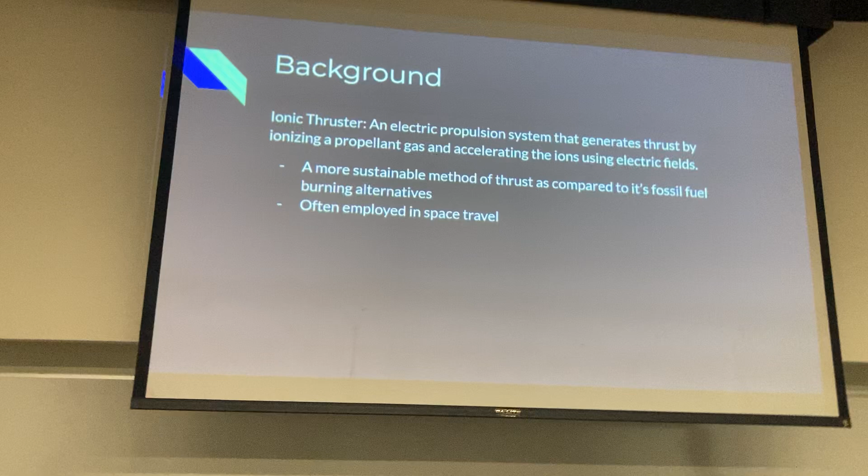Okay, so a little bit of background. First, what an ionic thruster is. I'm going to rely a little bit on the slide because there's a lot of words here. An electric propulsion system that generates thrust by ionizing a propellant gas and accelerating the ions using an electric field. So it's a more sustainable method of thrust compared to its fossil fuel using counterparts, and it is often employed in space travel. In fact, that seems to be the prevailing employment of the technology.

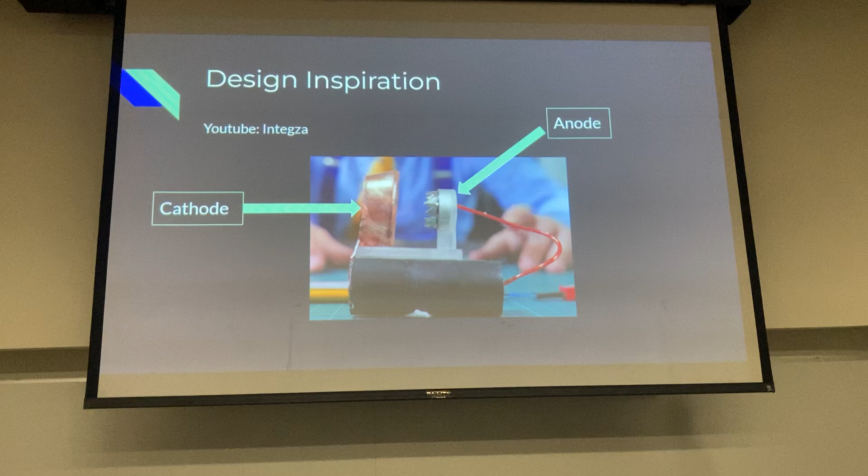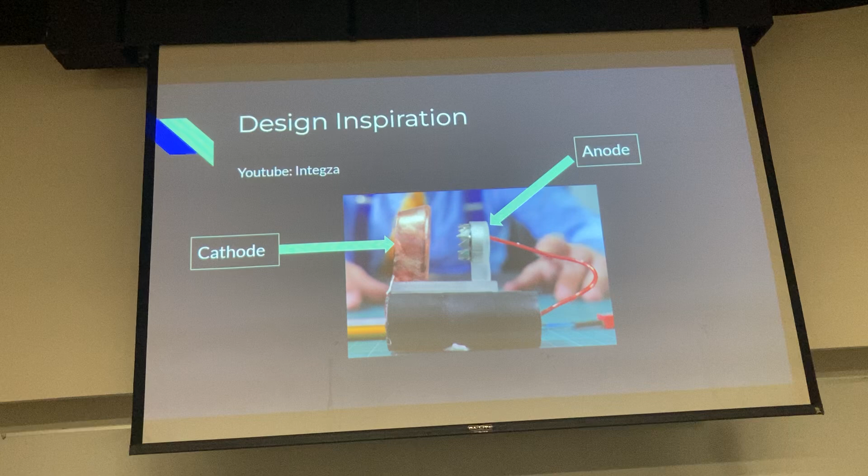So this was our design inspiration. When we decided to do the project, we figured we'd have to have at least a starting blueprint to model our design after. We looked through a few different YouTubers' designs, and we found Integza. He does all sorts of scientific videos building many different machines. He has a couple that went into the ionic thruster realm, and this was one of them. So we tried to emulate this design.

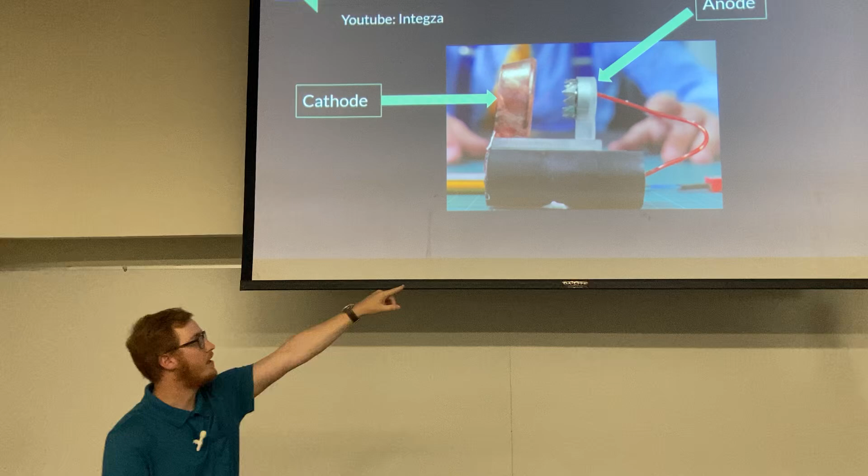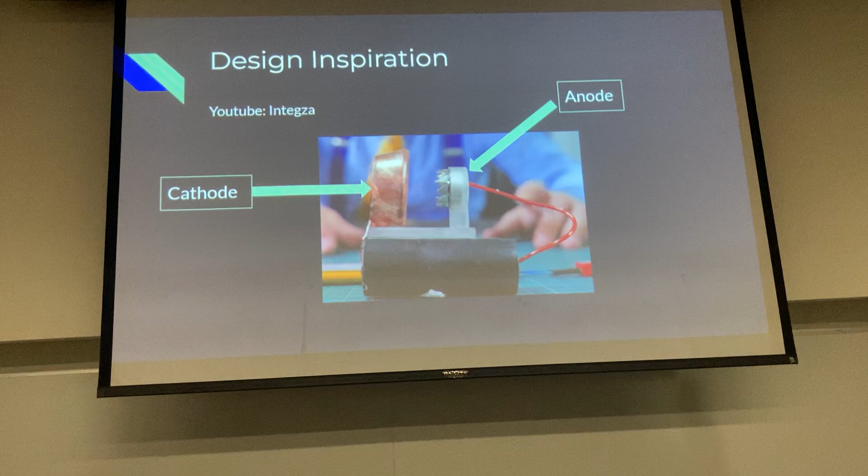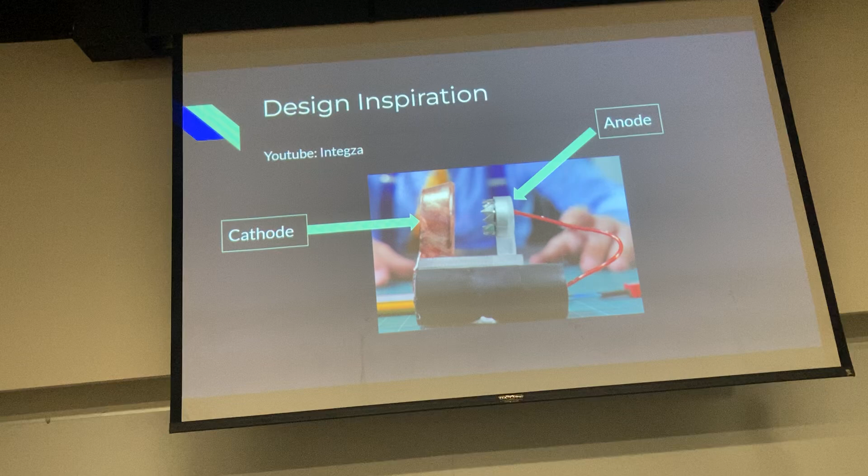At the bottom is that black portion, that's the transformer, which is getting some voltage from a DC power supply. You can see that red wire running up to the anode. That is a nickel piece that has been cut into a crown shape. It will get the charge from the transformer, and then it'll send that charge over to the cathode. That's a 3D printed piece that was then painted with conductive graphite spray and then electroplated with copper. So the anode takes that charge and it ionizes the air molecules, and then it forces or accelerates those air molecules through the cathode, creating some air velocity coming out the back of it, producing that thrust.

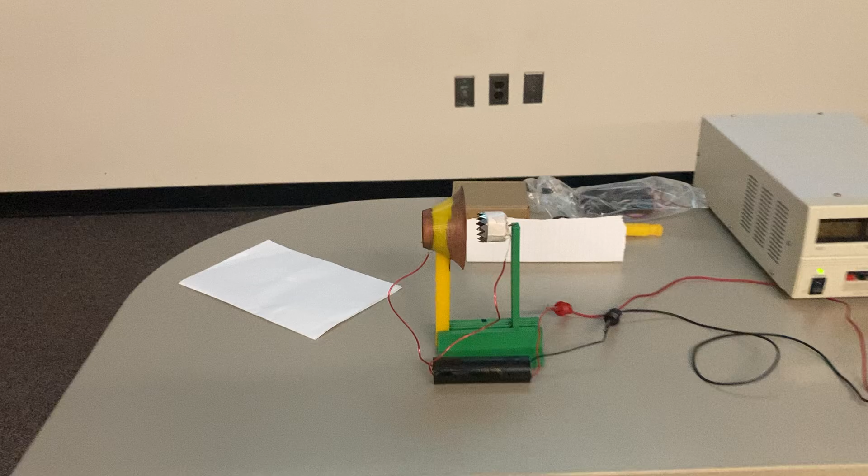Okay, so the initial plan was to test a few different variables. The original ones we wanted to test were diameters. We ended up kind of moving away from that as we went on. We might get into that a little later. But we also wanted to touch on what the voltage input does. How does the air velocity change depending on how much voltage is being put in? What kind of relationship is it? Is it linear? Is it exponential? What we were going to measure, like I said, was air velocity. That was going to be our metric going forward to determine what relationships there were, what was taking place inside the thruster.

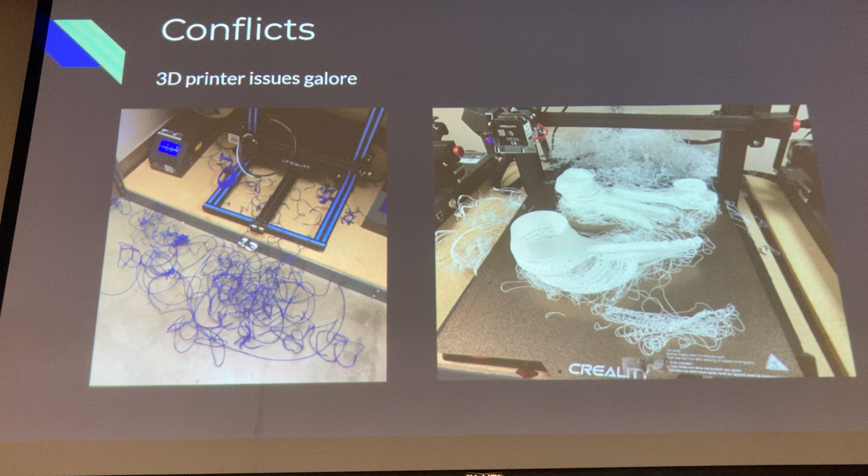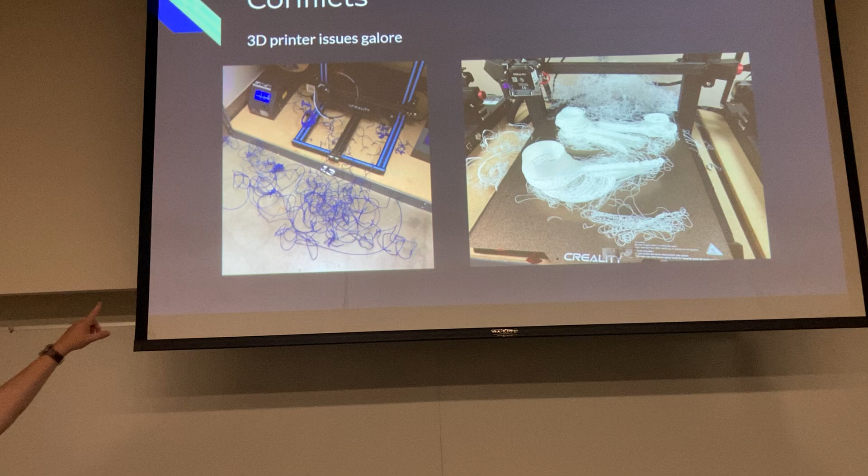But we had conflicts. I think it took about 15 prints to finally get what we needed. Here's just a couple examples of failures that I have no idea what the issue was. I never changed my file once. I just plugged it back in and eventually it worked. So like I said, those are just a couple of the issues we ran into. On the left, that actually messed up the printer quite a bit. A few of the components fell off of the printer and those needed to be fixed afterwards.

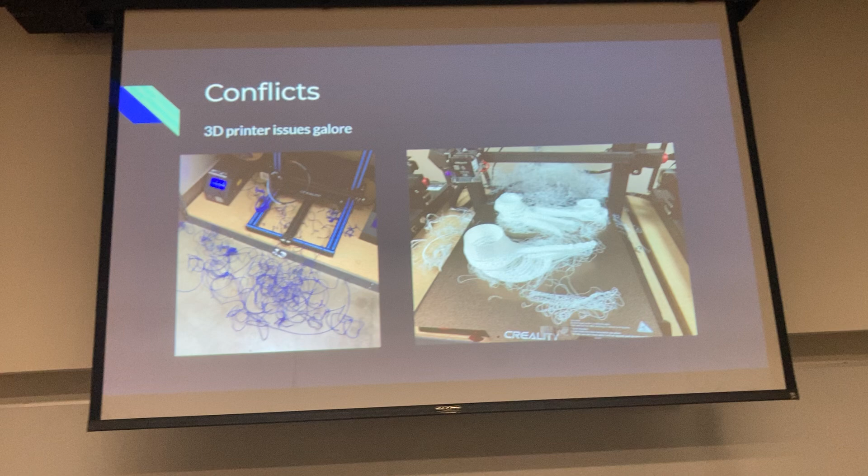Yeah, and just a quick add, I did meet with my father. He's a designer, and he sometimes 3D prints stuff. So I changed the design, and I tried to print it out, and then the exact same issues were happening. So it made us question what in the world was going on. We kind of nailed it down to it was probably the filament in the printers, because the printers got used a lot in the Learning Commons. So we were able to use the printers over here in the IME 100. And we ended up getting a lot better results.

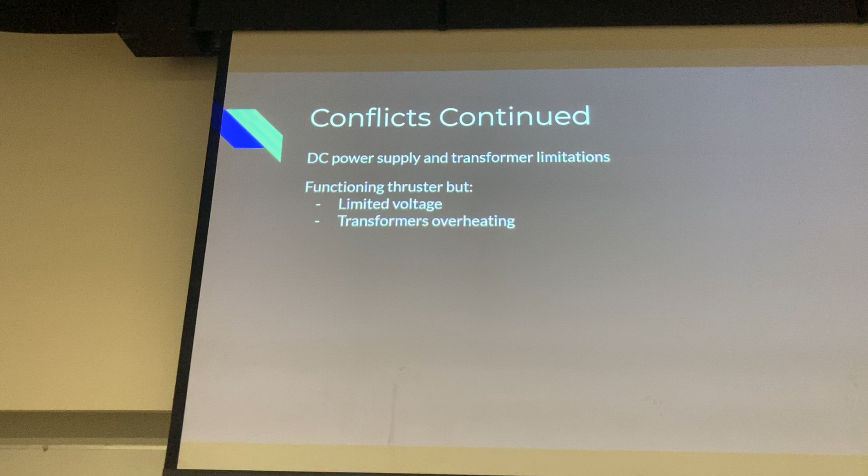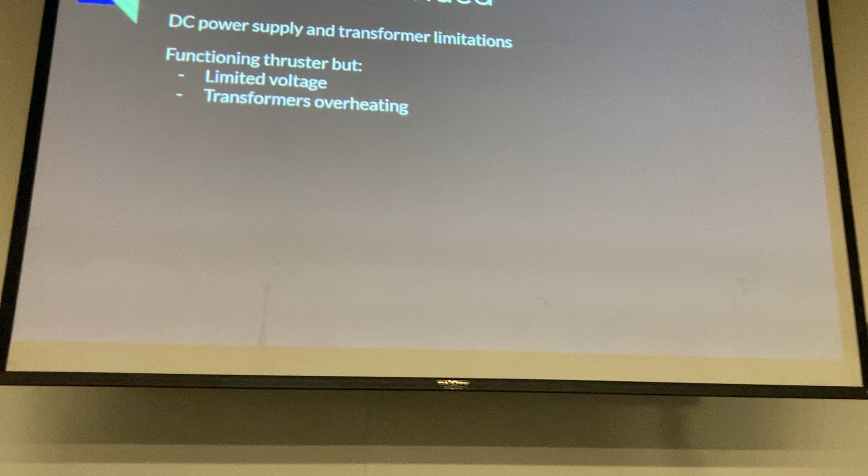Okay, so we also ran into some other conflicts. You can probably talk about those, you're more familiar with these. Yeah, so with the transformers, we were able to buy the 3 to 6 volts transformers, and they boosted up to 400,000 volts, or 400 kilovolts.

One of the main issues with them is they don't run for a very long time, so if you're trying to test multiple tests at one time, more than likely the transformer will blow up on you. Another issue was limitations in the voltage. We ended up buying 6 to 12 volt transformers to see more results, but past 12 volts we still couldn't get any results. So that was some limitations on the input.

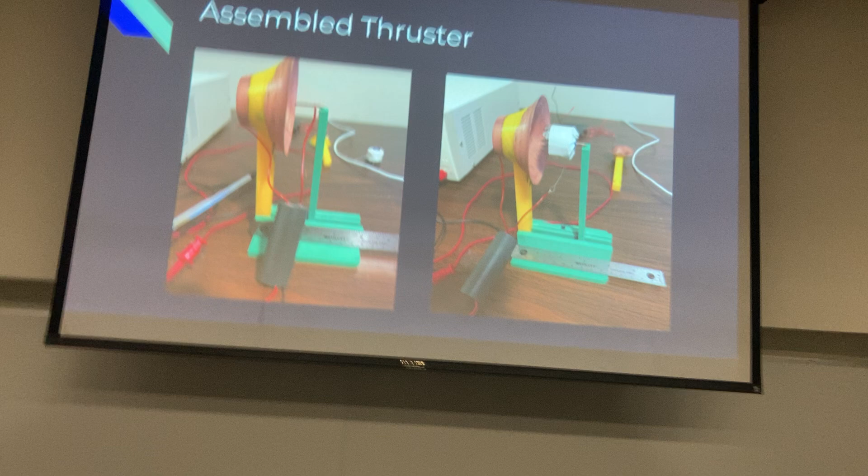This is a couple of pictures of the assembled thruster. At the bottom you might notice the ruler. I was doing some optimization with our design to see what distance worked best with our inputs.

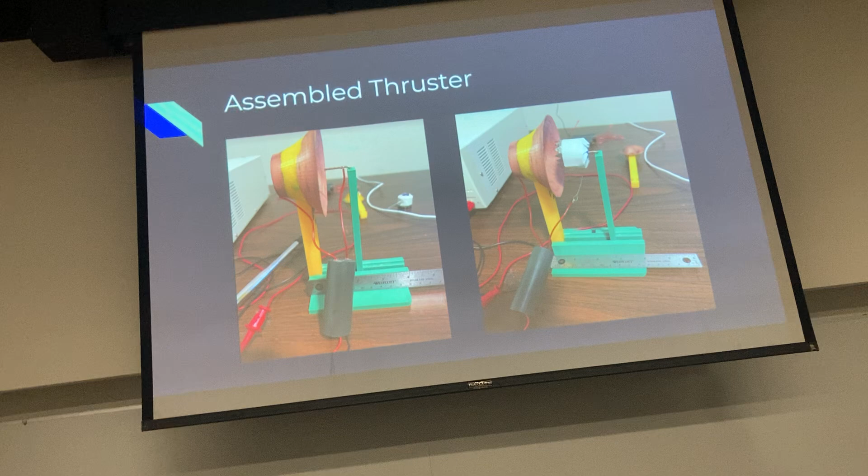You can also see there's a copper wire on the left-hand side, and then there's a crown on the right-hand side. The copper wire was just to see how the thruster would react with having one point instead of multiple points. Unfortunately, it didn't respond as well, so we went with the crown.

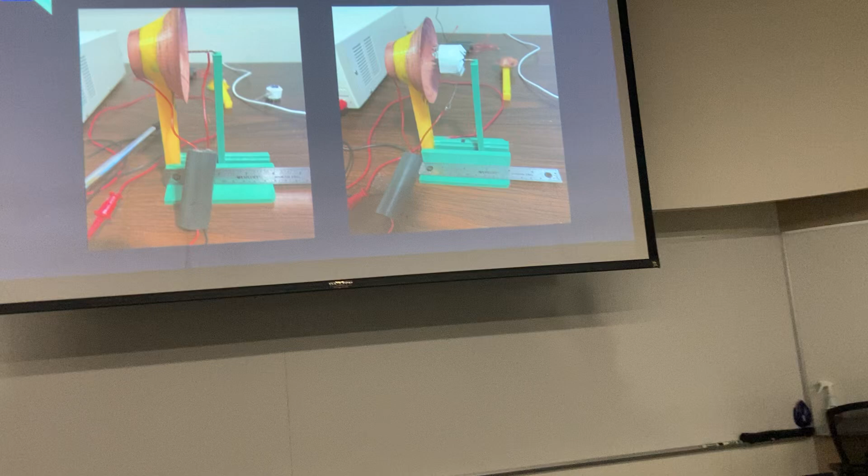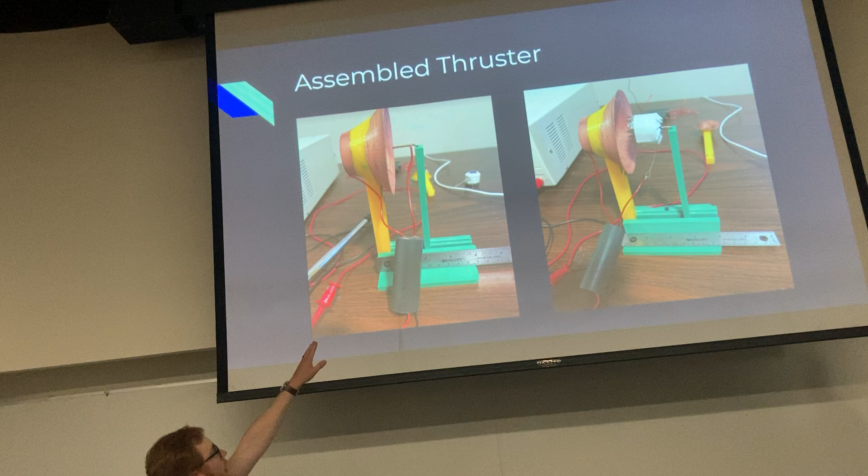So this was the... you can see it obviously looks a lot different, but it's got all the same components as in Texas, that inspiration we drew from. We have the transformer running up to our anode, and again we used the crown design. Like you said, we stuck with what we originally were going to use from that example.

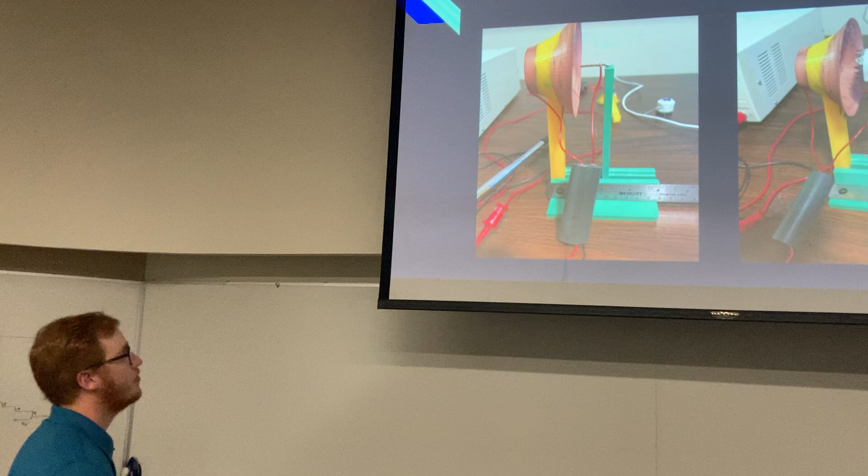We have a completely different shape, kind of a funnel there, the cathode, just because we designed our own, and when you're designing your own pieces, you kind of make things a little different. We raised it up a little bit, I'm not sure we had a particular reason for that, but we definitely went with a larger inlet diameter than he did. We also did a larger outlet diameter, just to maybe try to see if we can maximize the effects, get some larger forces out of the pressure coming out of there. Maybe we could reach a further distance or push over heavier objects.

I was in charge of the design more, and the reason why it's raised up so high is because when we were initially thinking about what we wanted to test for, I had up to a 6-inch diameter funnel, so it needed to be up in the air. If I wanted all of the tests to have the same starting point, I would need it to be raised up. That's why it looks like that.

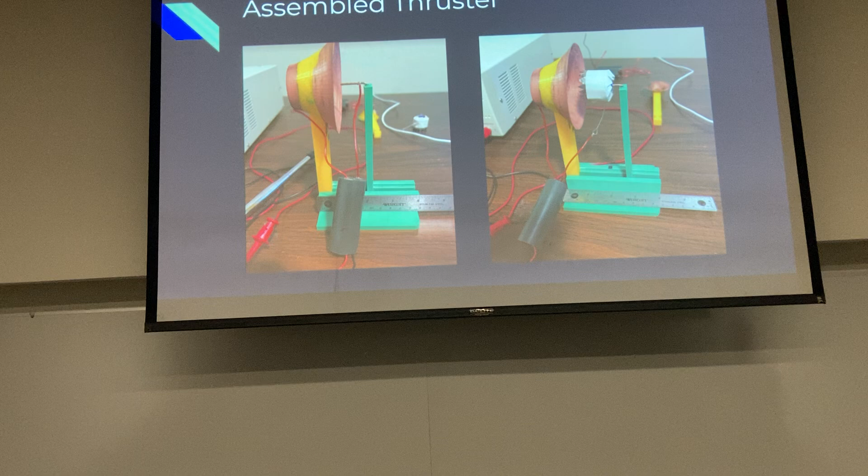Unfortunately, the bigger sizes were unsuccessful, so we were only able to get the 2-inch and 3-inch printed out and electroplated.

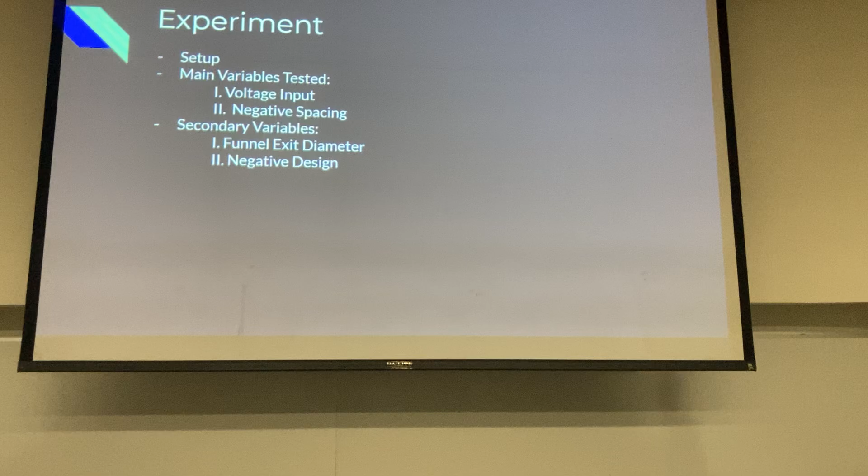Go ahead and talk about how you set it up, how you got your data, what you tested. So with the testing of this, I took everything home. I had to meet with Dr. Berry to get the power tester, because originally we were going to test everything in the Learning Commons, and their voltage generator only went up to 1 amp. So we needed more than 1 amp current, which is why I needed to meet with Dr. Berry.

Upon setting it up, I then tested from 3 volts all the way up to 12 volts and went by half-volt increments. Then I tested some different variables with the distance between the cathode and anode, and just found the sweet spot for our data.

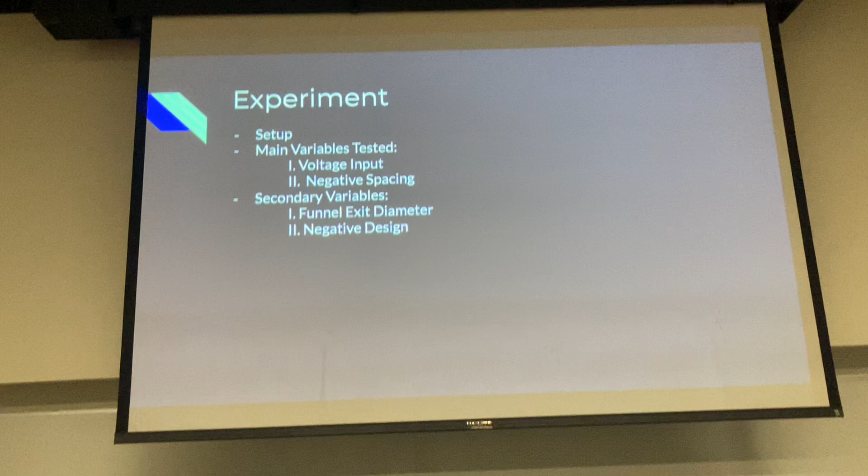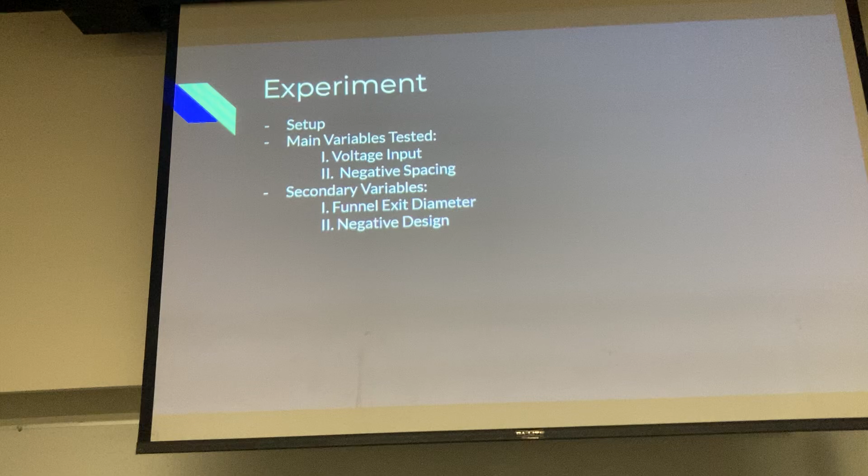And then the funnel exit diameter—I included all this inside of an Excel sheet that was then sent to Owen, and he was able to do hand calculations with it. So we had the input, or the large diameter and small diameter, as variables, and then we had spacing. We did have the smaller funnel that we did some testing with too.

Even though we initially planned to focus more on change in diameters because of the printer issues, as well as maybe just a change in our mindset for what we wanted to accomplish, we ended up only testing 2, and we heavily focused more on the 2-inch than on the 3-inch inlet diameter. That's correct, and we focused a lot more heavily on how the change in voltage affected the output velocity.

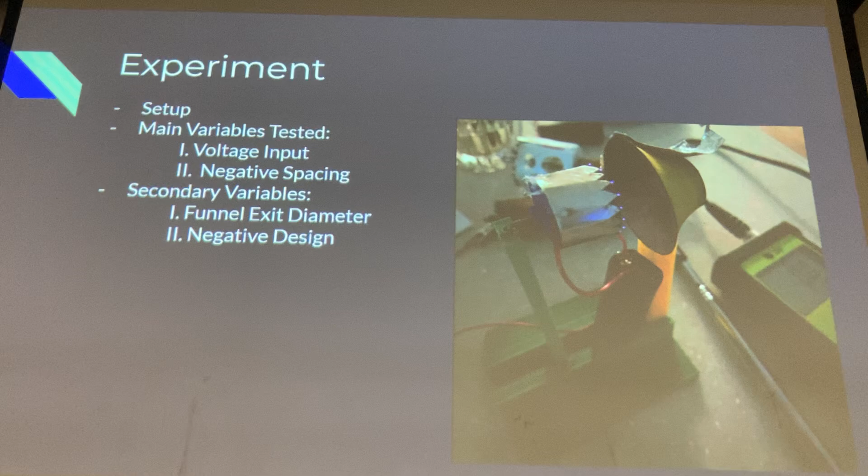And then this picture of it running—yeah, this was a picture, you can kind of see the plasma that gets produced. It's hard to see with how dark the picture is, but to really get a good view of the plasma, the lights did have to be out. You really couldn't see it when the lights were on.

We did want to run a demonstration. We planned on bringing a candle—I forgot the candle, it's all good though. So we're just going to have it blow this piece of paper off the table.

And so the input voltage is going to be set at 7 volts.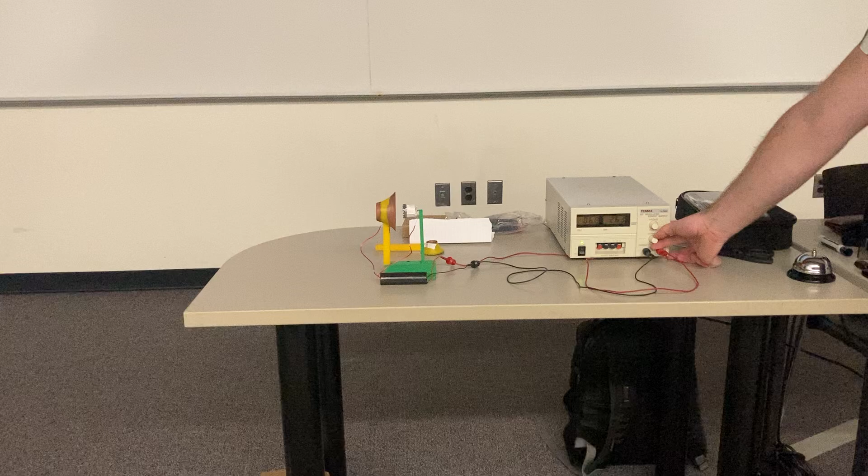Impressive. Yeah. Yes. Hold it. Wow, wow.

Excellent. That was the point in the project where things really started to turn around, up to the point of actually putting together the ionic thruster. We were getting discouraged, it seemed like everything was working against us. And then as soon as we got it to work, we both just essentially leapt for joy. We're like, we made it, we made an ionic thruster. And then we got a second wind to push forward on the project. It seemed like things were actually going to work smoothly from there, so we were able to move on.

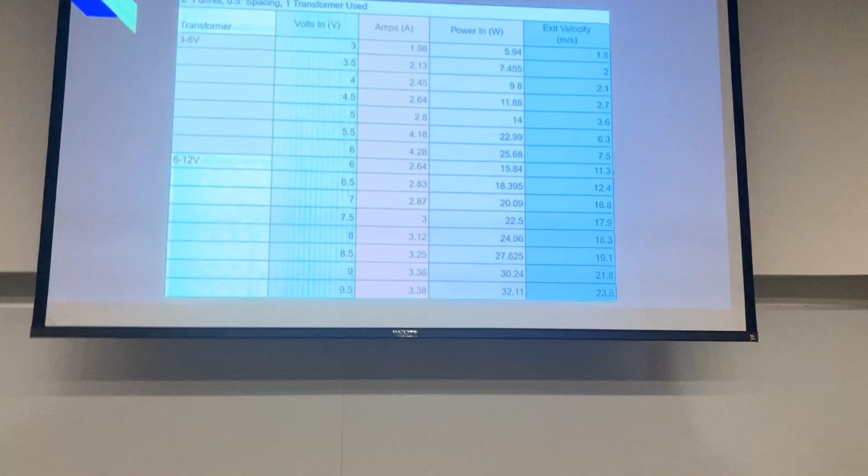Very good. Here are the initial findings. So then, like he said, we tested with 2 different transformers, which kind of ends up with us having a little bit of a hiccup.

We tested both of them at that 6 volt mark, but because we had 2 different transformers, they got 2 very different results. So when we went to go ahead and plotted different values, you'll see a weird spot in the graph where it kind of transfers.

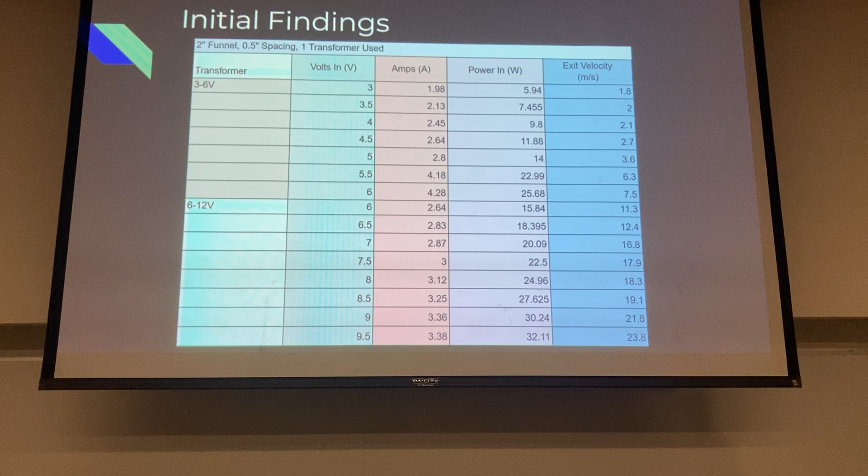But yeah, we did the test as high as we could with the first transformer, then we switched to the second to try to give us a wider range of data. We paid attention to the amps on the test.

And knowing the amps and the volts, we were able to use Ohm's law to calculate the power in watts. And we wanted that so that we could compare the power going in with the power coming out at the end to determine the efficiency.

And then obviously we had the exit velocity measured using an anemometer, and we were able to—go ahead. Yeah, I was going to say, as you can see, it only goes up to 9.5 volts.

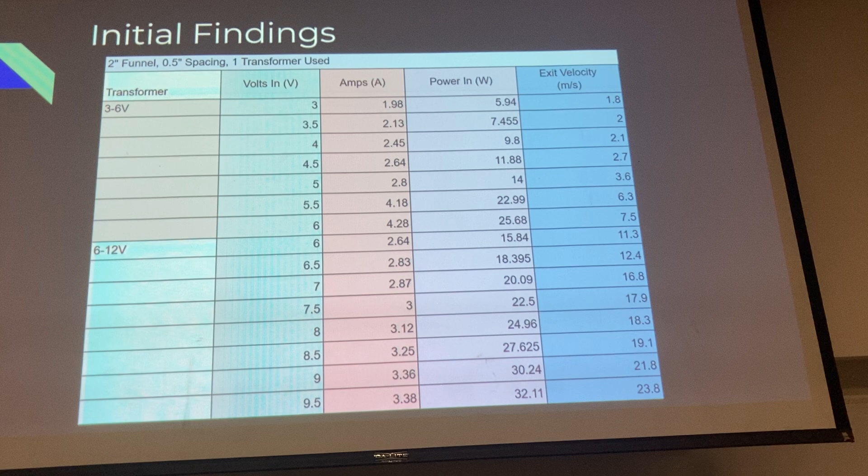I wasn't able to get all the way to 12 volts because the transformers just kept burning up on me. So I had to, eventually I figured out that I had to only test one at a time and let the transformer sit for 30 minutes to cool down, and then test again, sit for 30 minutes. So it took a very long time to get the results in, but yeah.

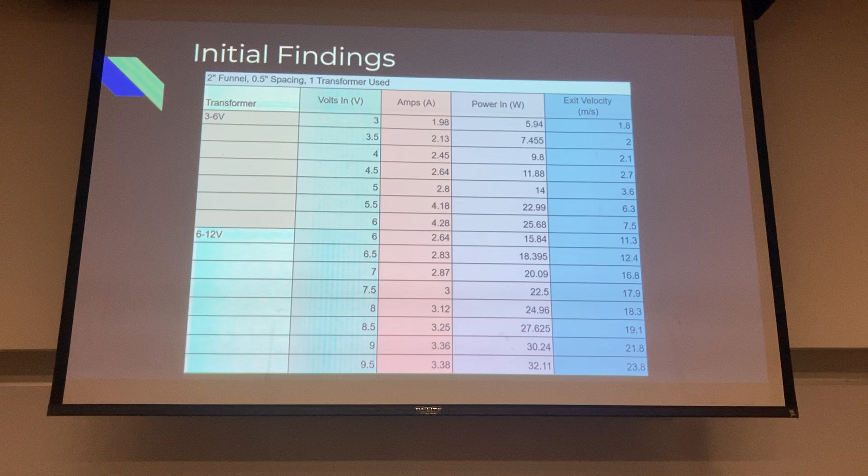And that again is with the 2-inch funnel. He did some testing with a 3-inch, we didn't end up getting too much data. We kind of just favored the 2-inch, sticking to the variable we decided to focus on, which was how did the voltage impact the exit velocity, as well as we'd end up checking a few other measurements we're going to talk about here next.

Okay, so with that data that we had, we decided to make a scatter plot with the voltage and the exit velocity that came out as a response. And then with that, we made a line of best fit that we could then plug into equations going forward.

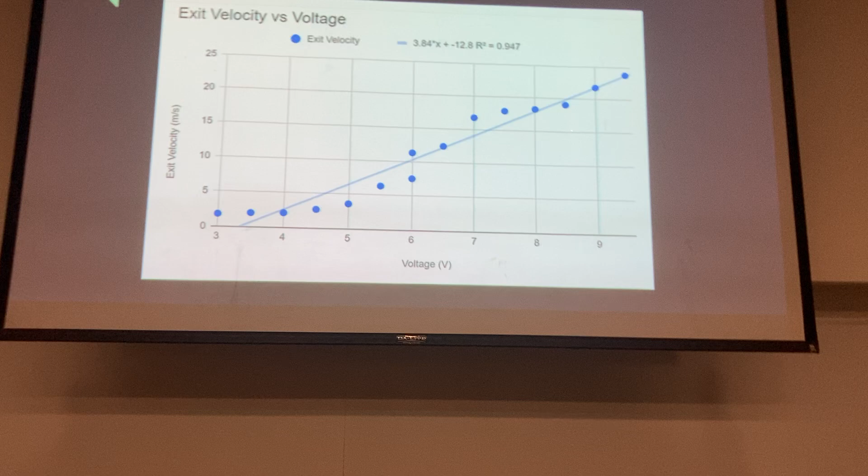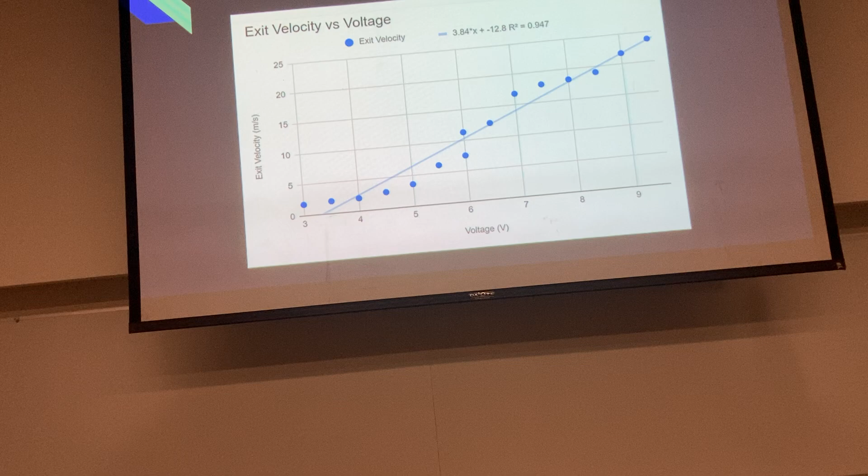Okay, so you can see I had an R-squared value of 0.947. Looking at the chart, it doesn't look that great, but actually I feel like that's a pretty good value to be working with. It's obviously just estimates going forward using this.

But we want to have a function of exit velocity according to voltage to then plug into a couple different formulas that we'll be getting to here momentarily.

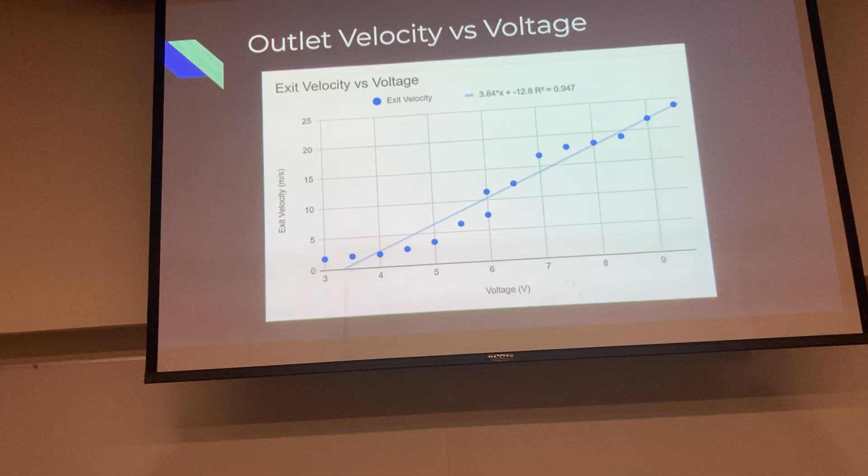The first one of those was inlet velocity. We were curious what the velocity would be right at the entrance of the funnel. We knew that outside of the funnel, the air would be coming from 0, just resting in the atmosphere. But we wanted to know, since we knew how fast it was traveling as it came out, what the speed was right at the entrance.

But understanding that we only had one inlet and one exit, but we also had a change in diameters, we decided to use mass conservation, and then also divided out density, since we knew the density would be the same at starting and ending. So what we had was A1, V1—essentially Q1 equal to Q2.

So I divided the area of the inlet over to the other side so that we could solve for the inlet velocity in terms of that exit velocity. And we had that formula.

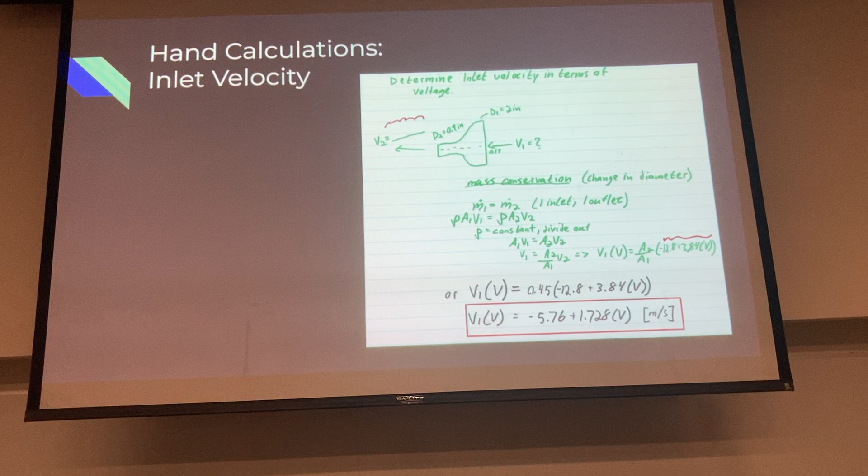So the line of best fit ended up being negative 12.8 plus 3.84 times the voltage. We plugged that in, and that gives us a formula, and numerically that's negative 5.76 plus 1.728 times the volts. And that ends up giving us our velocity at the inlet in meters per second.

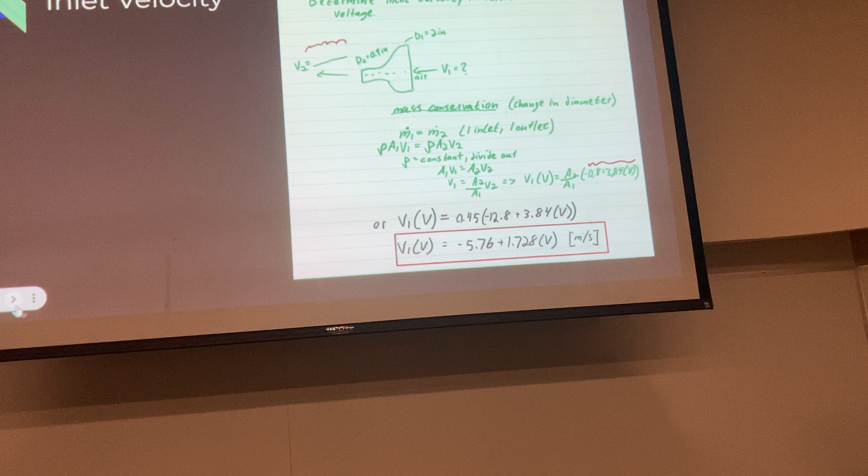So that was something we were just curious about, but then some of the other formulas were to give us actual informative information about what was taking place in the thruster that would help us determine the plausibility of using this, where it may be applied.

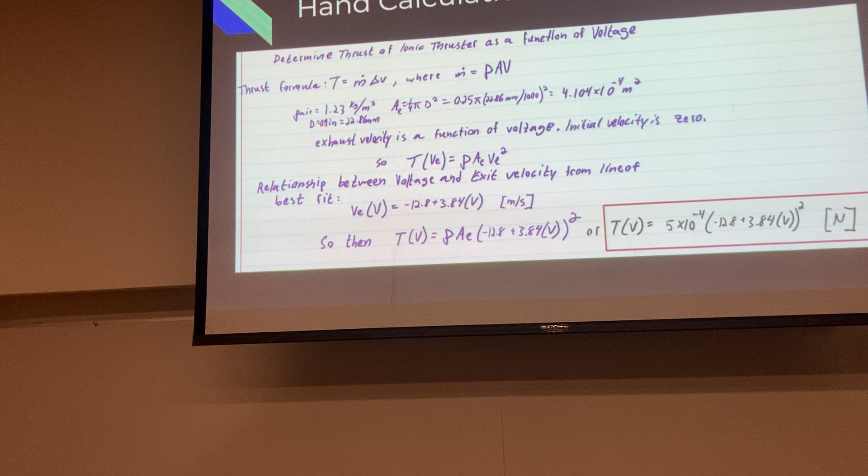And so the next one was the thrust. We were curious what kind of thrust this put out, being that it is a thruster. So I took a formula for thrust from what I found online to be used for a fan. I figured this was working similarly to a fan, taking still air and pushing it through a confined area to accelerate the air. So I took thrust equals mass flow rate times change in velocity.

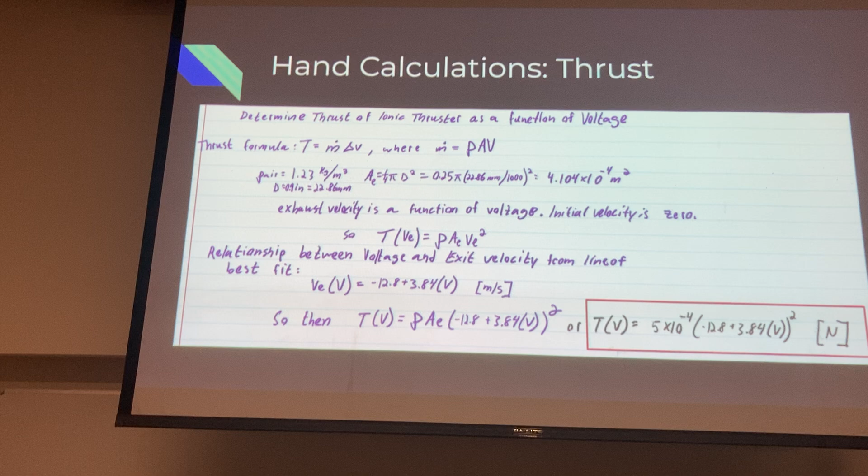And we know that the mass flow rate is density times area times velocity. We had the density of air, we had the area because we knew the diameter, so we could calculate for area. And we knew that the exit velocity in this case was a function of voltage. We knew we had a relationship between the voltage that goes in and the velocity that comes out. So I decided to input that, and we also needed to note that the initial velocity, not talking about at the inlet, but talking about outside, was 0.

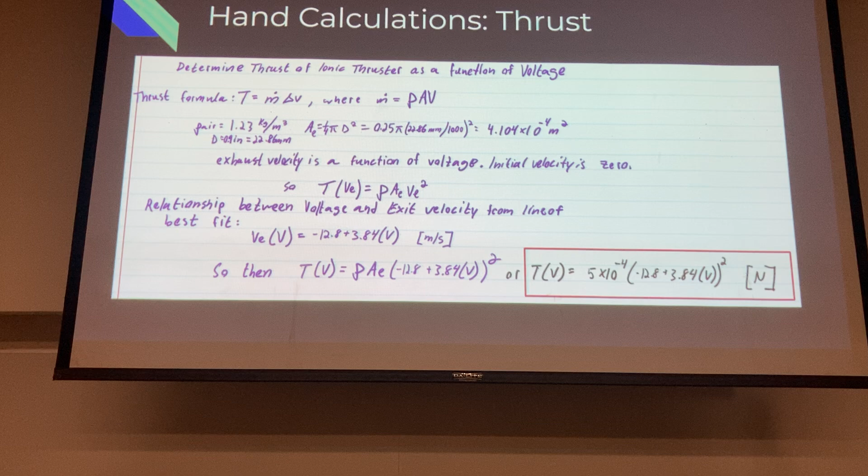So going forward, we have T, thrust, as a function of the exit velocity. So now we still have the density, area, exit velocity squared. The reason that's squared is because m dot v, and m dot in itself has the velocity in it, so we had the two velocities multiplying by each other.

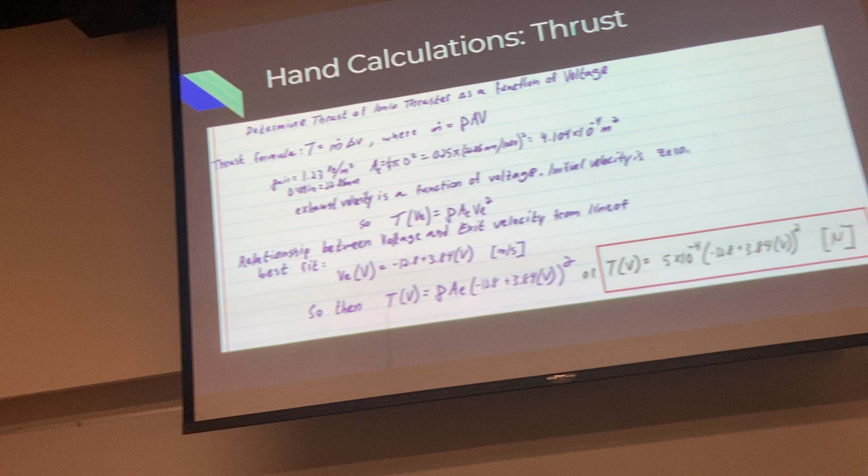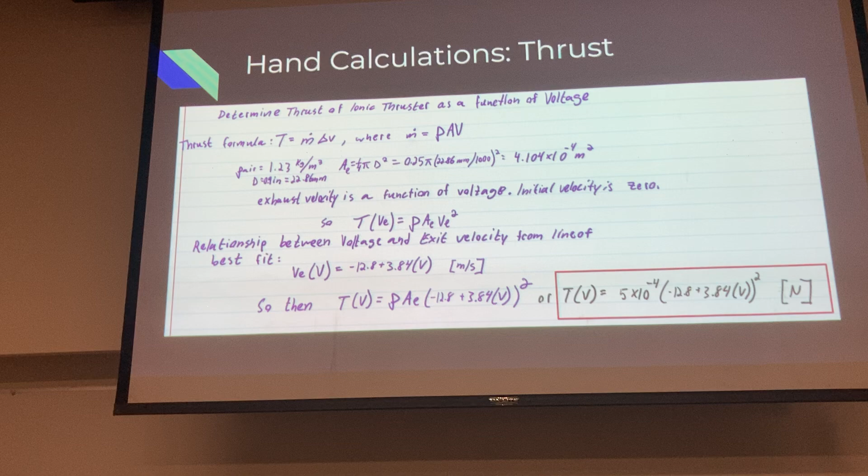So now we wanted to look at the relationship, so we pulled in that equation we had for the exit velocity in terms of voltage from the line of best fit. We noted that, and then we plugged that into the thrust equation. So we ended up with the variables there, but numerically we had thrust as a function of voltage. Numerically it's 5 times 10 to the negative 4th times negative 12.8, there's our velocity function, plus 3.84 times v, and that gets squared, and that gives us thrust in terms of newtons.

Do the units all work out? We'll double check for the report.

The last thing we wanted to take a look at was the thruster efficiency. We used fan efficiency equals power out divided by power in. We knew the power in because we used Ohm's law, as we discussed earlier, having the voltage and the current to multiply to give us the wattage. And then we just needed to calculate the power out. I found the formula for the power output of a fan is 1/2 mass flow rate times exit velocity squared.

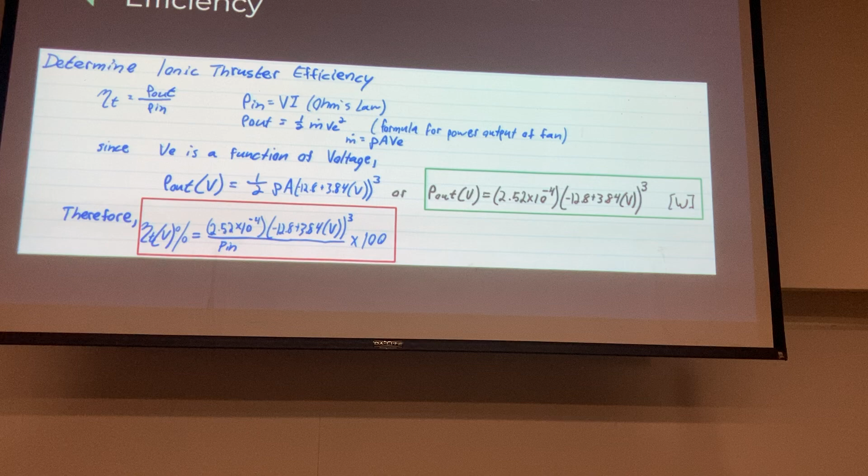So we reworked that since we knew exit velocity, again, is a function of the voltage. We input that voltage to calculate velocity again into the equation. That simplified to give us P out equals 2.52 times 10 to the negative 4th times our function, cubed, which gave us power out in watts. Then we took the power out and plugged it into our efficiency equation, and decided to multiply by 100 to get it in percent form.

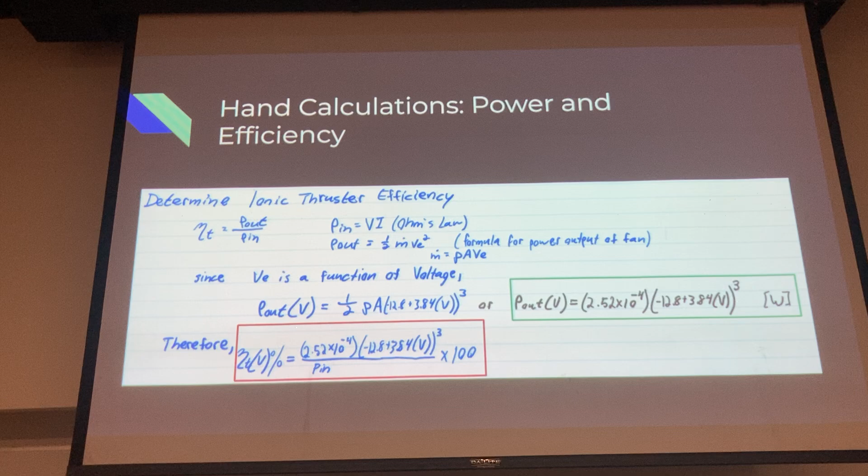When we ran those calculations, we were able to add onto our table inlet velocity, thrust, power output, and efficiency for each data point.

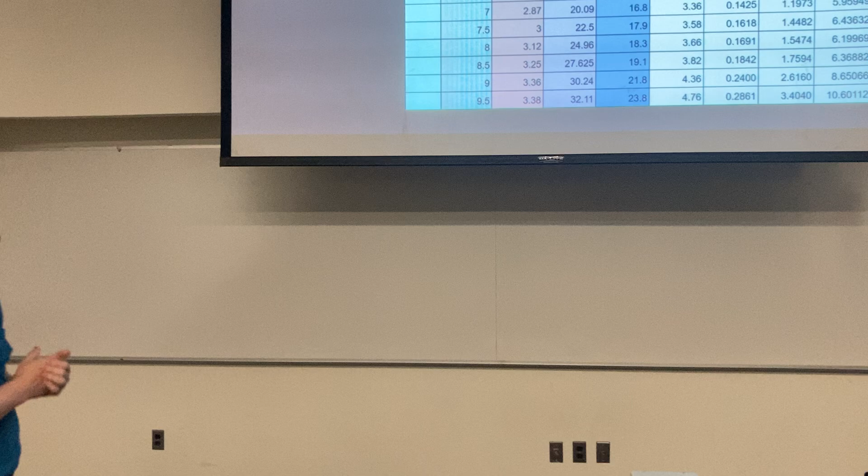And what we saw really honestly surprised us, especially on the efficiency side of things—it was extremely low, about 0.02% at the top, and we only got as high as 10.6% at the bottom at 9.5 volts. So what first surprised us was how low the efficiency was, and the second surprise was how much the efficiency increased with voltage increase. We found that an interesting relationship, and what we talked about earlier was that if this was running on a very high voltage system, maybe it would be more worthwhile, since we'd end up with higher efficiency if that trend holds true.

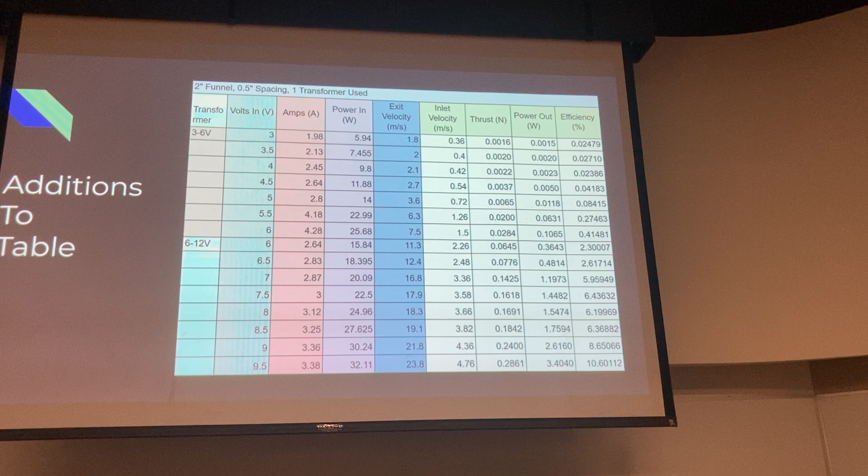So yeah, we didn't necessarily find our limitations on our design. We just went to what the transformer's limitations were.

So just from that data, we were able to plot graphs of all the different variables we calculated in terms of the voltage. And what you'll find across the next couple of graphs is that if you watch the shape of the curve, it's almost identical on all the graphs. You can go ahead and look—that was inlet velocity versus voltage. Here's thrust versus voltage, almost identical shape. Go ahead to efficiency versus voltage.

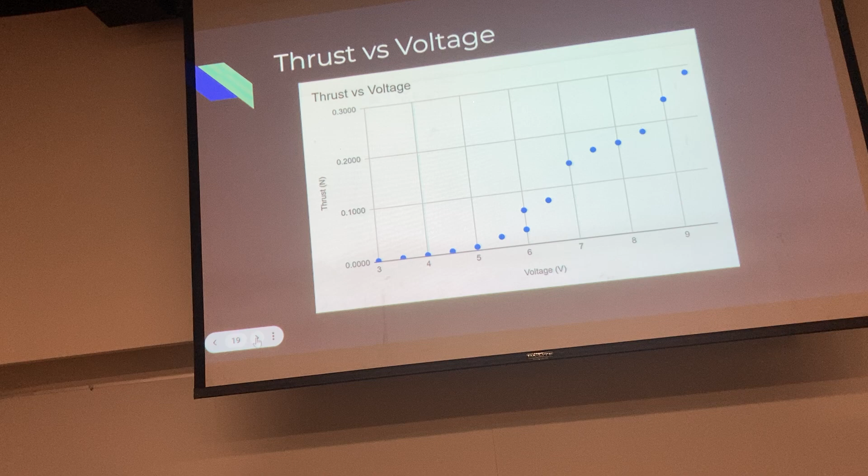If you hit the space bar, does it go to the next one? It should. I don't know, maybe.

And then there's the efficiency. It starts out lower, but then again, it follows a very similar shape going on up to that 10.6%.

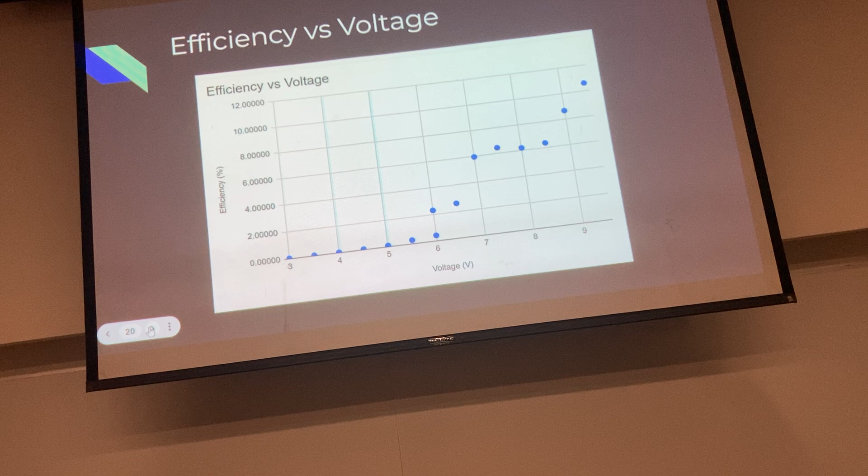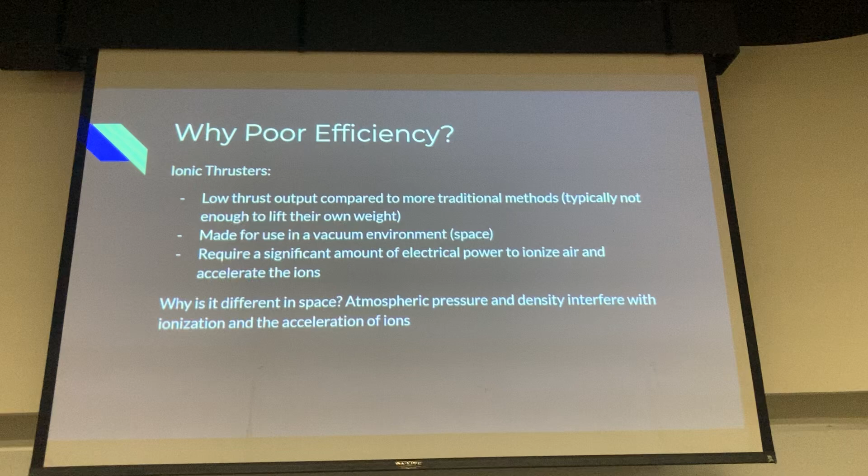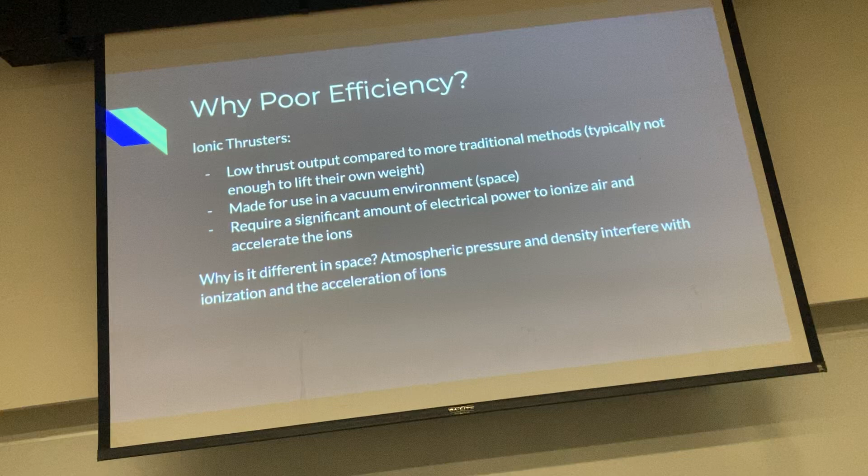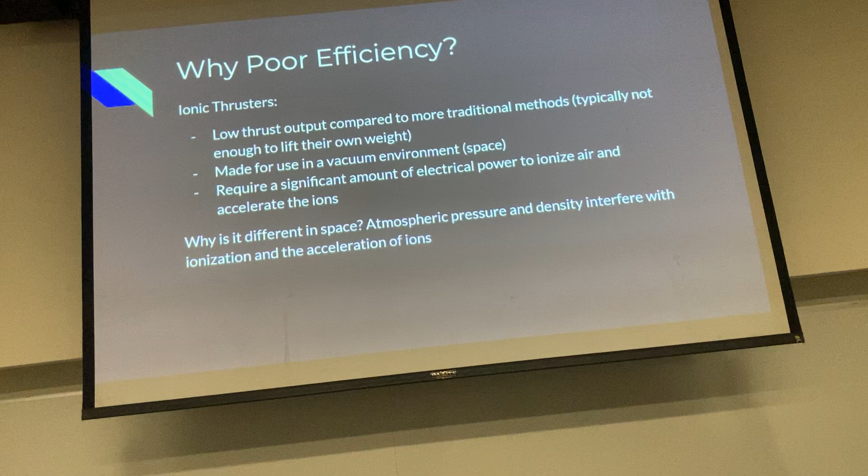We were surprised by the low efficiency, so we started to research why. What we found was that ionic thrusters put out such a low thrust compared to more traditional methods, like chemical engines and jet engines. They're also made with the use in mind of being in space, in a vacuum, functioning in a completely different environment, and they require a significant amount of electrical power to ionize the air and then accelerate the ions.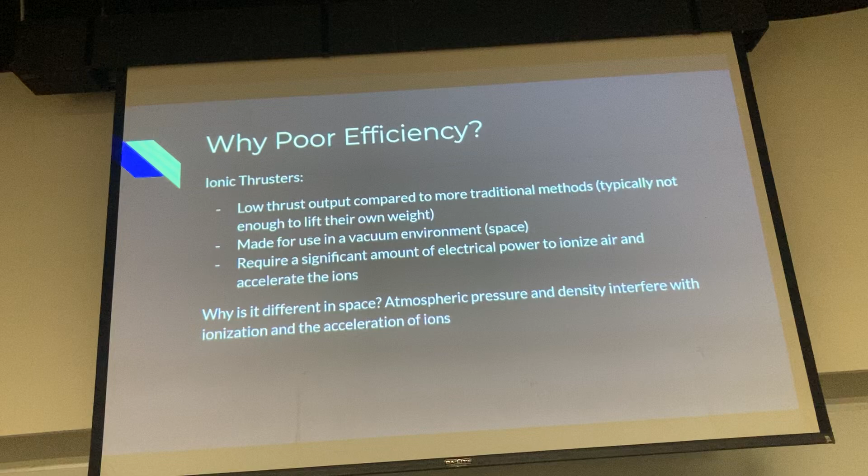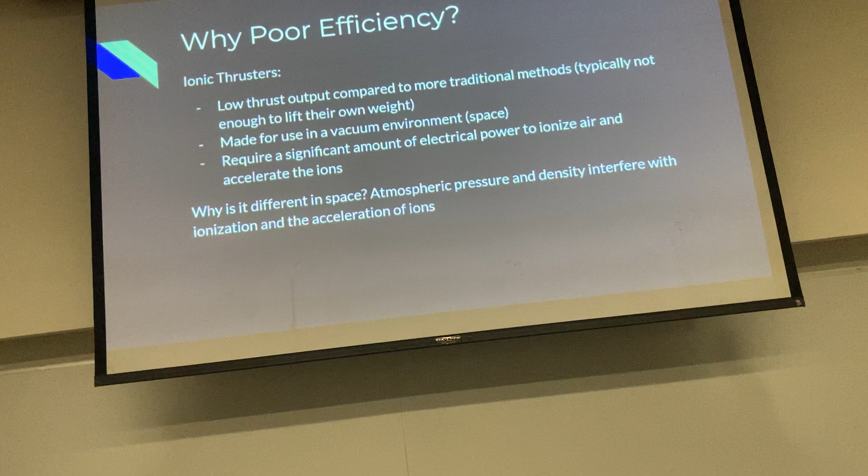So why is it different in space than it is here on Earth? It's simple: we have the atmosphere. The atmospheric pressure and the density interfere with the ionization and acceleration of the ions. The atmosphere is actively working against the process of the ionic thruster.

Also, something to note: in space I believe they use xenon as a gas, and this just uses the air, oxygen or the air.

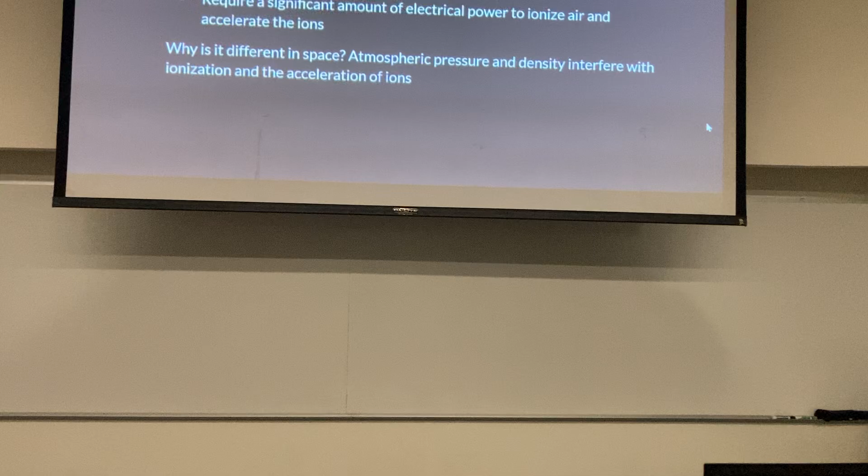So to conclude, we had many hiccups throughout, especially early on, but we powered through with help, thanks to you, Dr. Perry, and you encouraged us when we were considering stopping. We were able to construct an ionic thruster, which was one of our main goals, and that we achieved, and that made us very happy and helped us keep going.

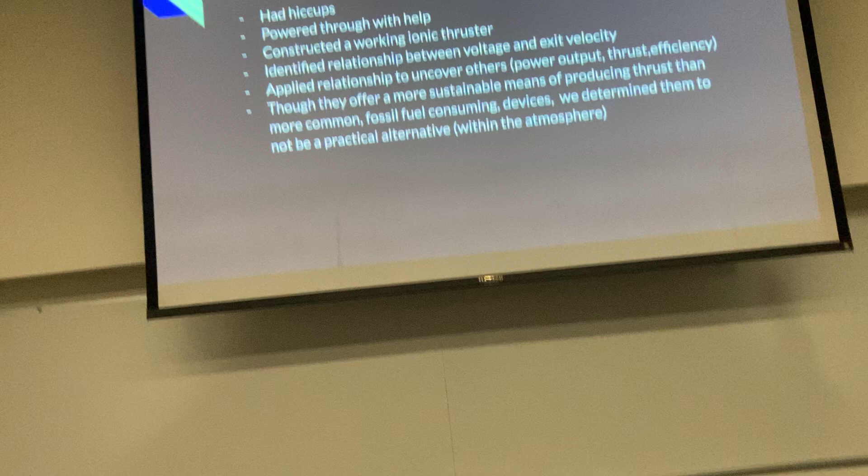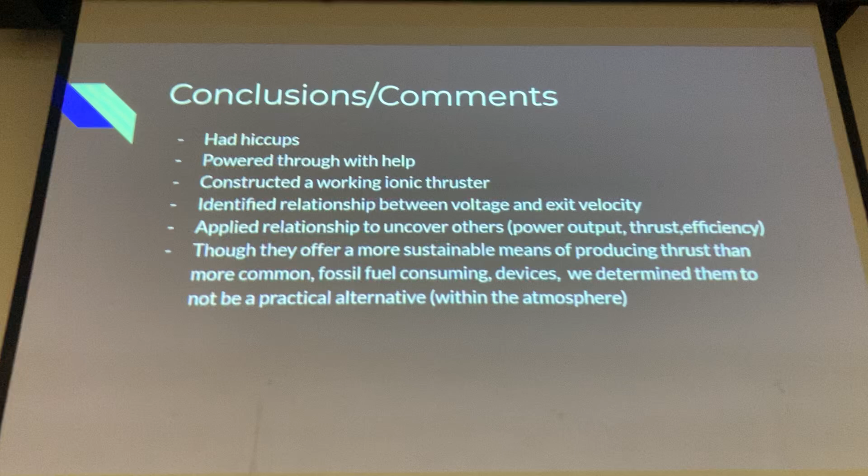We identified the relationship between the voltage and the exit velocity, and we were able to use that relationship to uncover others, a parametric relationship, between the voltage and other variables like the power coming out, the thrust, and the efficiency.

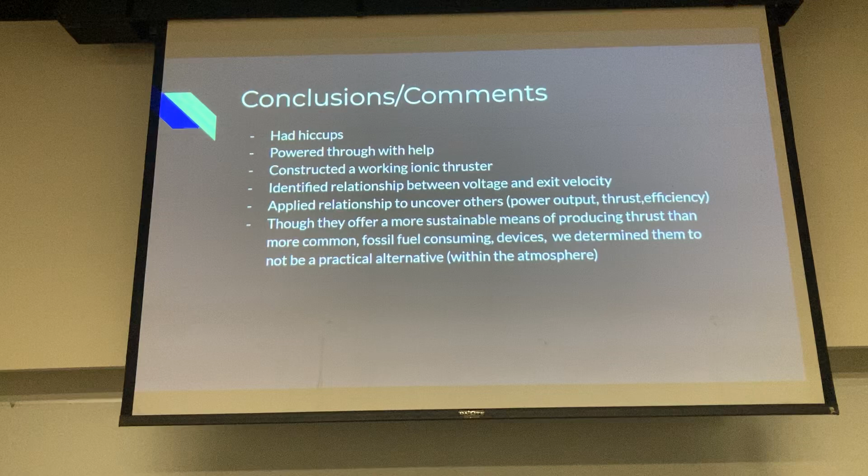And we found that though ionic thrusters offer a more sustainable means of producing thrust than common fossil fuel devices, such as jet engines, we did determine them not to be a practical alternative to replace them, at least not in the atmosphere. In space, most certainly, because it doesn't have the atmosphere to contend with. So unless the technology changes or something's developed, we didn't see it as a reasonable replacement for things such as jet engines.

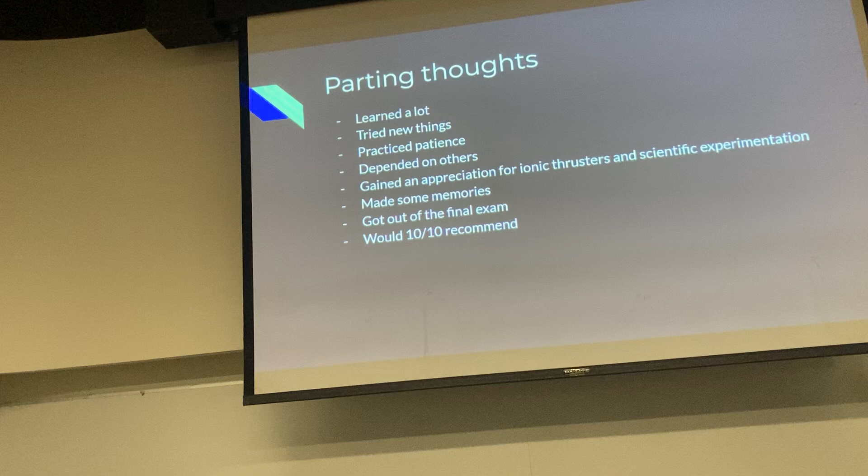And then also we had some parting thoughts after that. We definitely learned a lot. We tried new things and were able to work with new equipment and tools. I hadn't worked with 3D printers in several years. At first it was fun to get back into it, but then we saw all the issues and how tricky they can be.

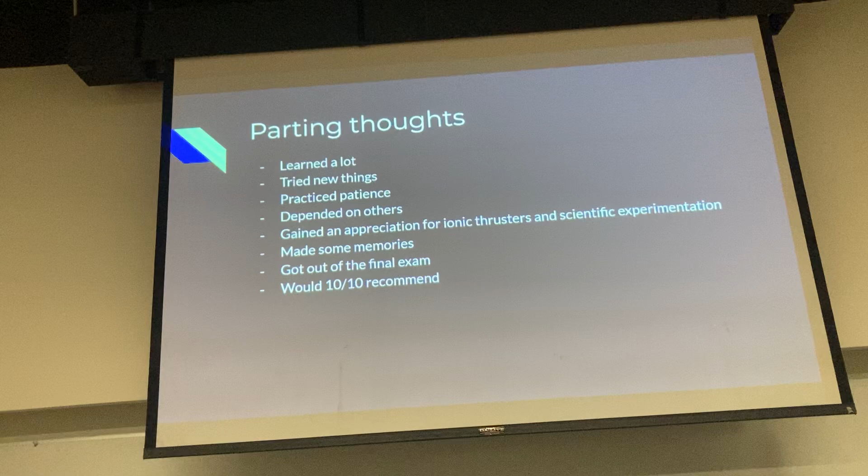We depended on others for help several times. We depended on you, Dr. Barry, and we were able to depend on Professor Watchhorn and some other people to get us access to tools. Kurt got us the different tools we needed.

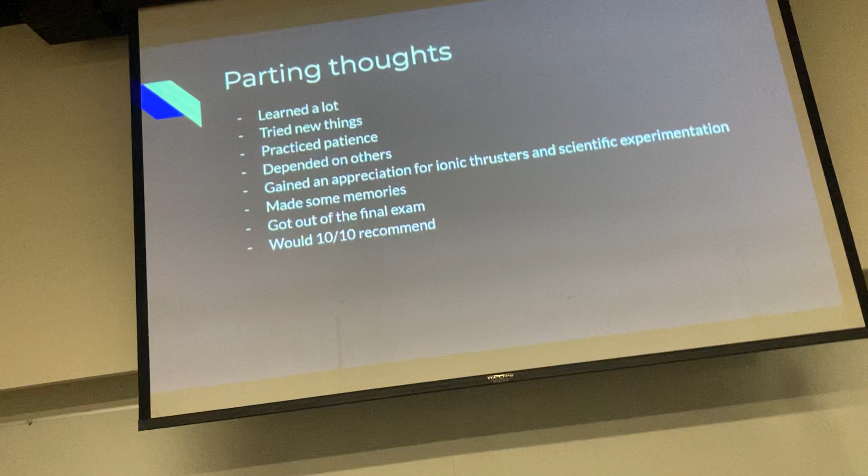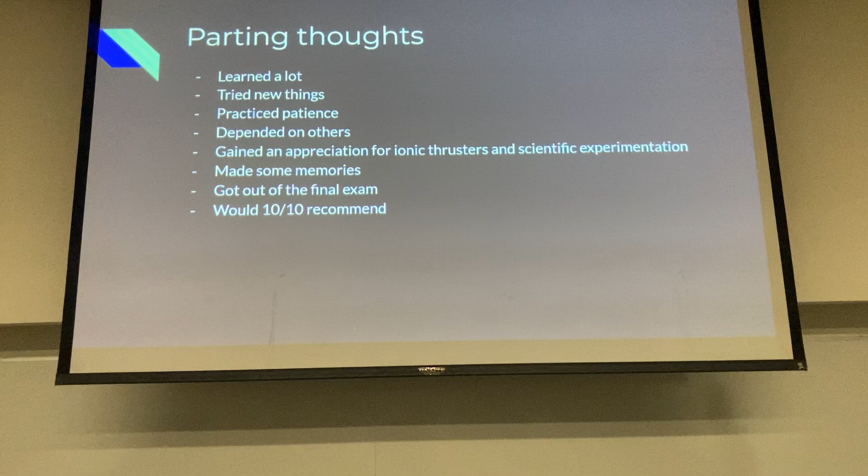We gained an appreciation for ionic thrusters. We had a hard time getting this to work, and it made us appreciate it that much more when it did work. We also gained appreciation for scientific experimentation, thinking about the patience it takes to have an idea you don't know will work, to put in the time and labor to bring it about, and to face setbacks along the way but still maintain the resolve to keep going and uncover something new.

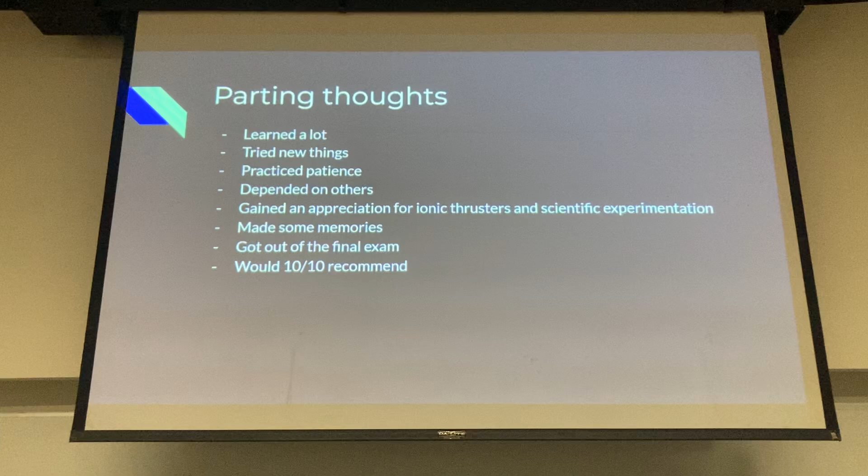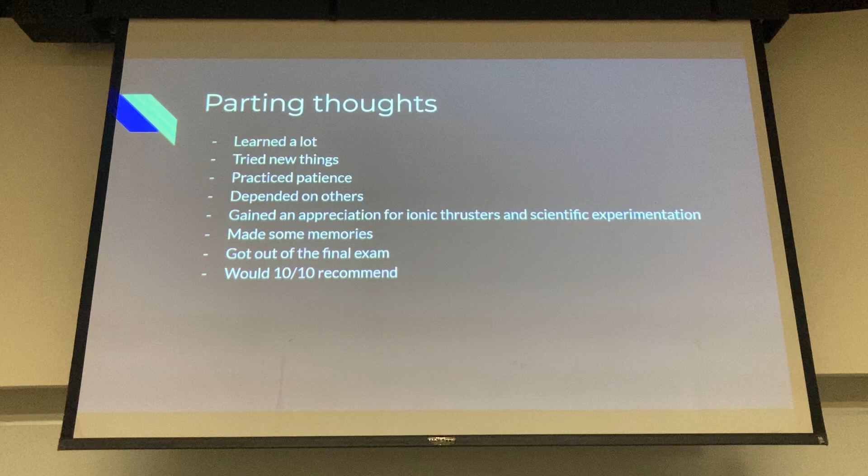We also made some good memories, and we got out of a final exam. So we would ten out of ten recommend the project option to any future students. We thought it was a great learning experience. We've sat through dozens and dozens of final exams here at Kettering, and I can't say they really offered a beneficial experience that helped me along, but I could see this project leaving some thoughts and memories that'll last a while and help spark interest in some different areas.

Any final parting thoughts? Yeah, I just really appreciate the opportunity that was given to be able to make something that I saw online that I never thought I'd actually be able to make. It was a really cool experience, and I definitely recommend people chase after whatever they're interested in, no matter how impossible it may seem.

Fantastic, great job. I have a couple of parting thoughts as well. Let me just go next door.